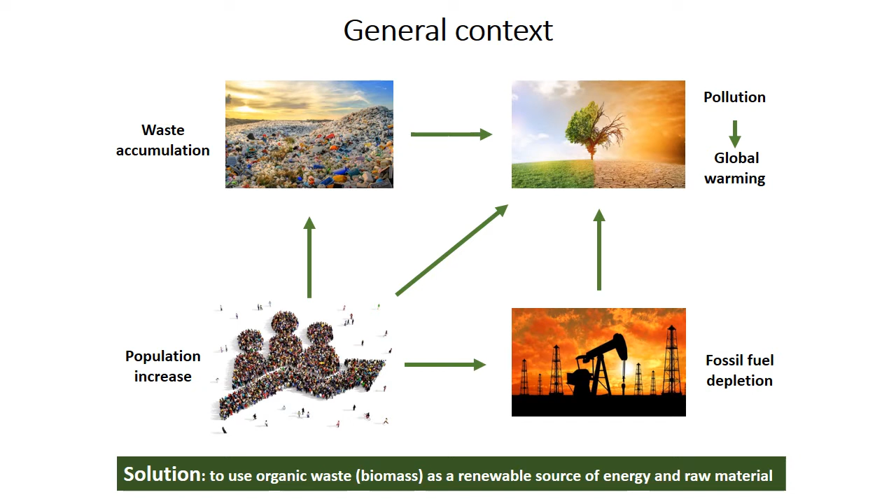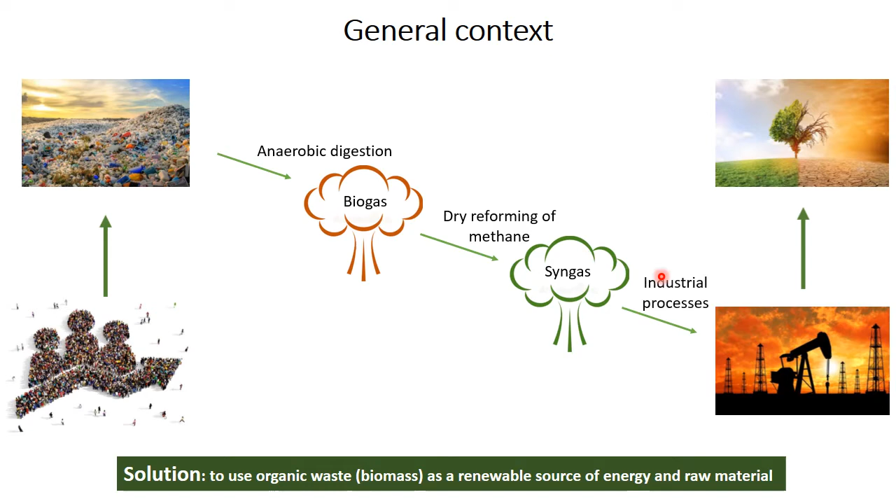To break this cycle, the solution would be to use the waste accumulated to produce biogas through an anaerobic digestion process, and then to convert it into syngas or synthesis gas through the dry reforming of methane reaction. Then the syngas can be used in several industrial processes to produce sources of energy and other raw materials.

So the process we are going to discuss in this presentation is first the production of biogas from biomass or organic waste using the methanation or anaerobic digestion process on an industrial scale, and second, the conversion of biogas into syngas on a lab scale using the dry reforming of methane reaction.

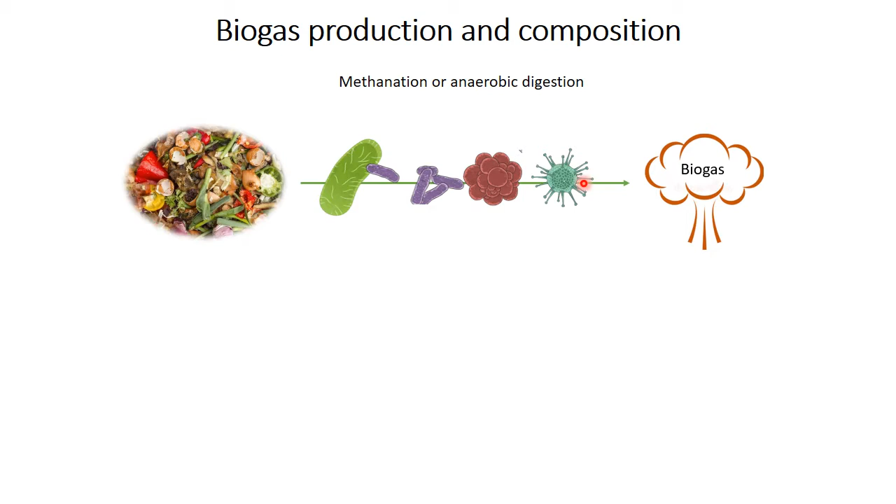First, we are going to start by discussing the anaerobic digestion process that converts biomass into biogas. This process takes place in an environment without oxygen in the presence of several microorganisms, mainly bacteria or archaea. In these conditions, a series of reactions can take place to break down the organic matter into a gas called biogas and composed mainly of methane, carbon dioxide, and nitrogen, and it can contain small quantities of water and oxygen.

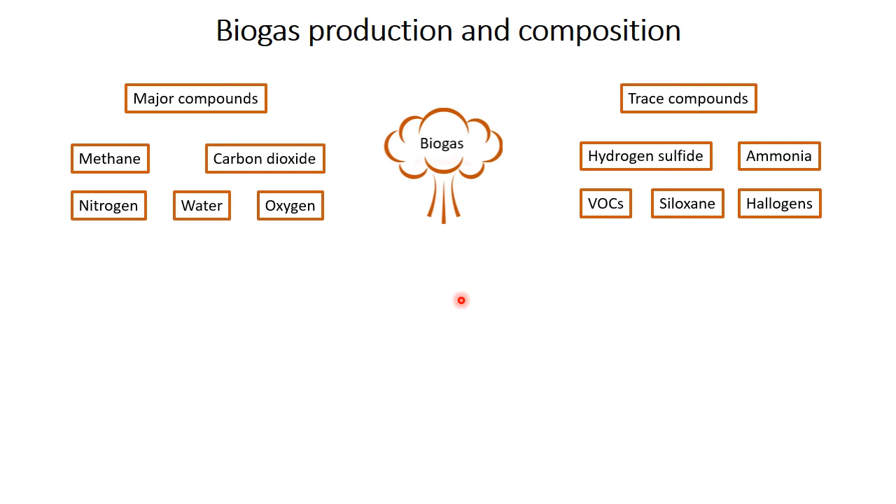In addition to these major compounds, some trace compounds such as siloxane, hydrogen sulfide, ammonia, halogen compounds, and volatile organic compounds can also be found in biogas. Its composition depends on the process conditions, on the microbial population, the composition and age of the initial waste, as well as the methanation plant. Biogas can be produced in an anaerobic digestion plant, in a landfill, and in a wastewater treatment plant.

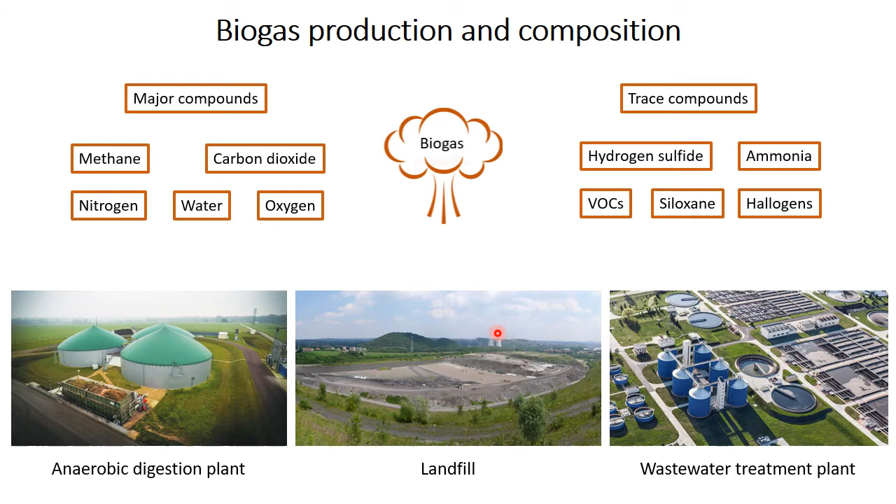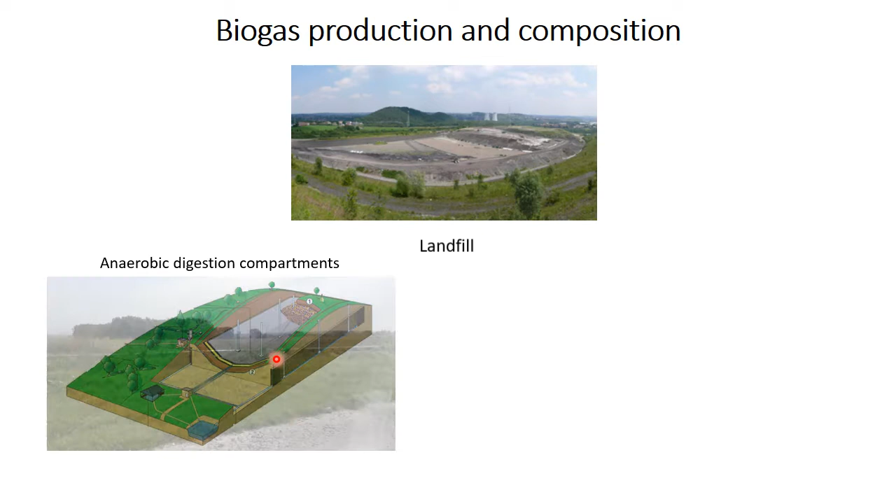In our study, we have chosen to work with biogas produced in a landfill located in the north of France. This plant is made of several sealed underground compartments where waste is stored. This is where methanation takes place. Then the produced raw biogas is directed using conducts into an upgrading station where undesired products such as H2S, siloxane, and VOCs are eliminated. Finally, the clean biogas is used in a cogeneration system. In our study, we have analyzed the biogas at the outlet of the underground compartments, here, right before any purification treatment has occurred.

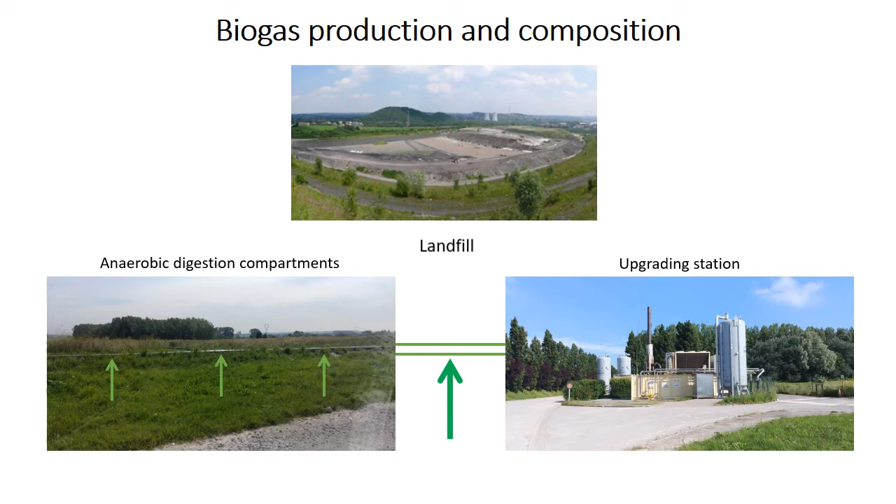Gas chromatography was used to determine biogas composition. This technique was coupled with a thermal conductivity detector for major compound identification and quantification, as well as a flame ionization detector for minor compounds. Methane and carbon dioxide represent respectively 33 and 27% of biogas composition. They are the most valuable gases for its valorization. Oxygen and water are detected in smaller concentrations of 4 and 1.5%, and they can also play a role in biogas valorization.

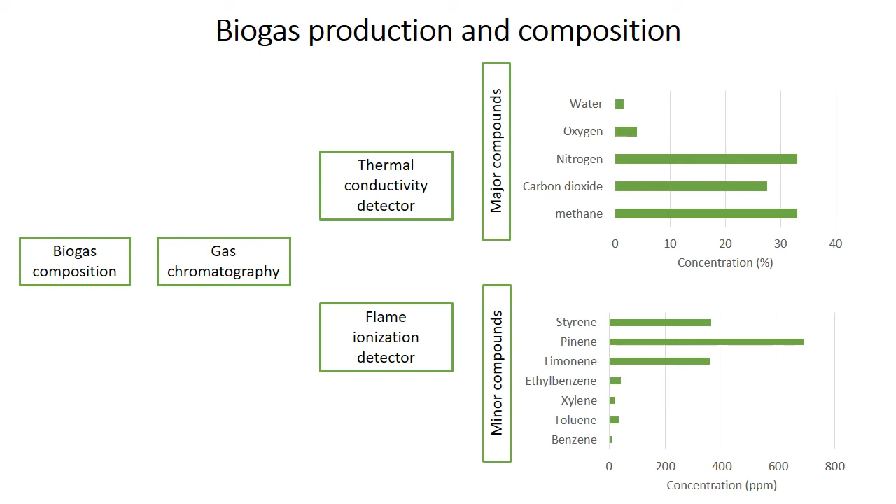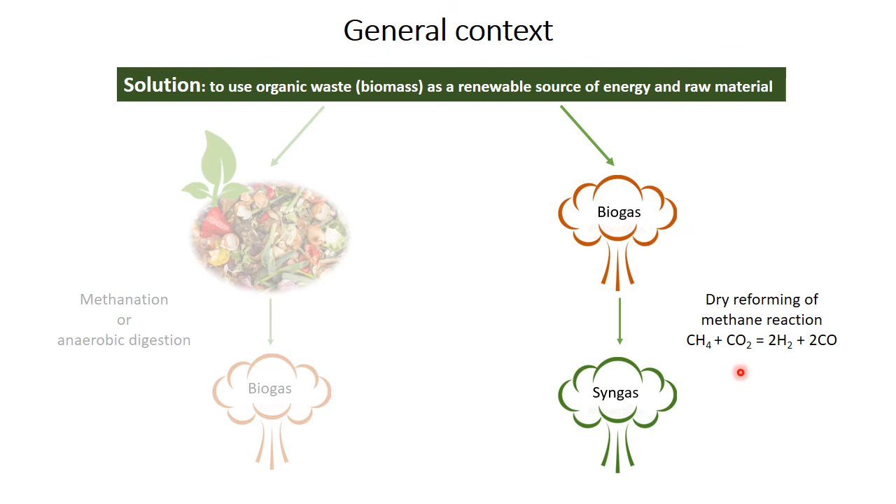The presence of these compounds may affect the valorization process of biogas, which is why they are removed during the upgrading process. In this study, we have chosen to determine the effect of the presence of these molecules during the valorization of biogas in the dry reforming of methane reaction. This reaction is the conversion of both major compounds of biogas, methane and CO2, into synthesis gas made of hydrogen and CO.

However, this reaction is highly endothermic and requires temperatures higher than 670 degrees for taking place. For this reason, it is important to use a catalyst to increase the yield of the reaction at lower temperatures. On the other hand, the catalyst needs to be selective towards the dry reforming of methane reaction because secondary reactions can also occur in the same temperature range.

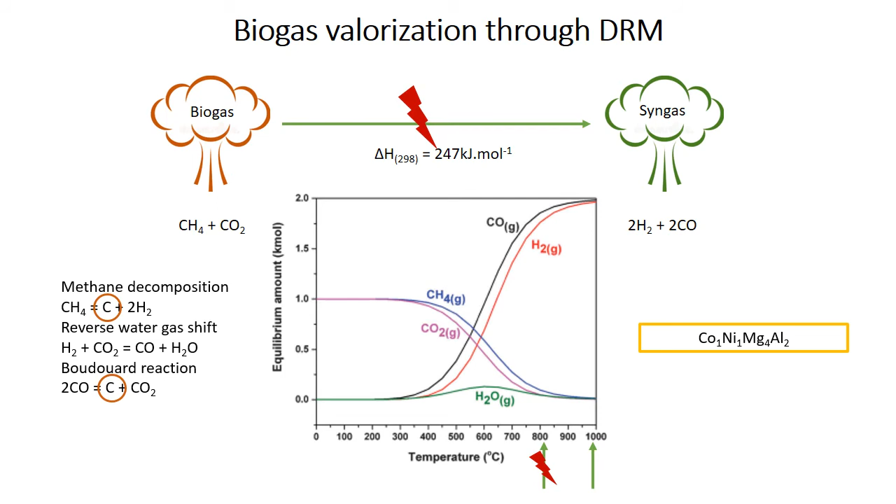More specifically, carbon-forming reactions such as methane decomposition and Boudouard reaction can take place and cause the deactivation of catalysts by carbon deposition. In this prospect, we have studied the effect of the presence of VOCs molecules on the performance of a cobalt-nickel-based catalyst that was already determined to be active in the DRM reaction in previous studies.

The catalytic performance was monitored using the following setup. In the current study, toluene was selected as model molecule for VOCs. A series of 12-hour stability tests was performed at 750 degrees on the reduced catalysts.

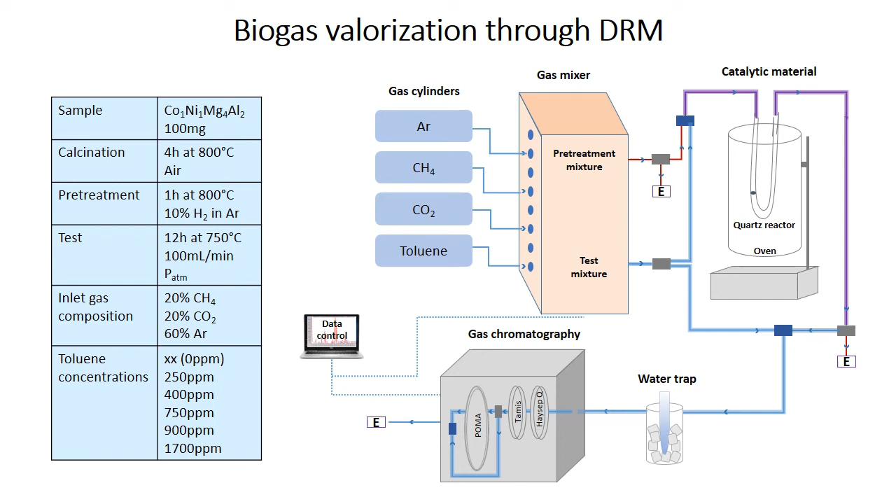The synthetic mixture containing CH4, CO2, and toluene diluted in argon was passed through the quartz reactor containing the reduced material and then was analyzed by gas chromatography coupled to a thermal conductivity detector. The concentrations of all inlet gases are comparable to the concentrations that were detected from the biogas analysis. The conversions of reactants as well as H2/CO ratio were monitored.

We have followed during 12 hours the conversion of methane and carbon dioxide in the absence and the presence of different concentrations of toluene. The catalyst remained stable for the duration of the test in all of the mentioned conditions. This shows that the presence of even the highest concentration of toluene did not cause the complete deactivation of the catalyst. On the contrary, the curves show that in the presence of toluene, the reactants' conversion increases with time.

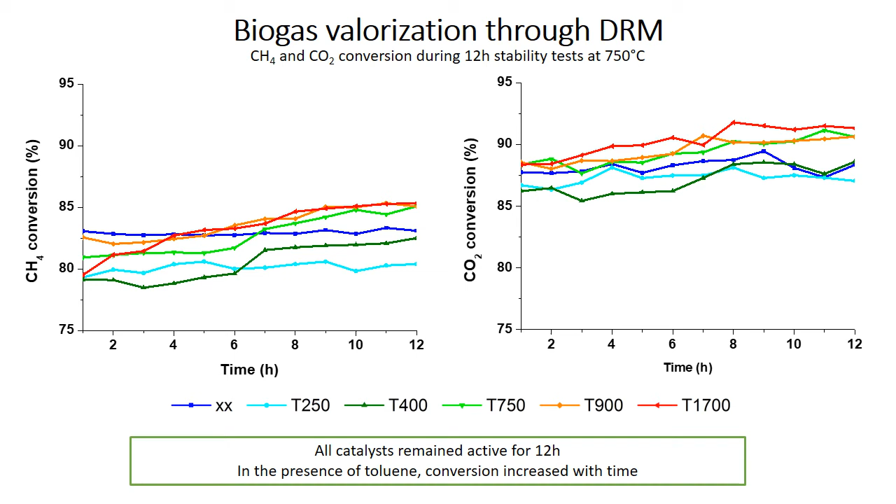We also notice that the conversion of CO2 is higher than the conversion of methane, signaling the occurrence of secondary reactions. This result is confirmed by the H2/CO ratio lower than 1. This could be linked to the occurrence of the reverse water-gas shift reaction, which converts CO2 and H2 into CO and H2O. This would explain the conversion of CO2 higher than CH4 that we noticed during the test, as well as the H2/CO ratio lower than 1.

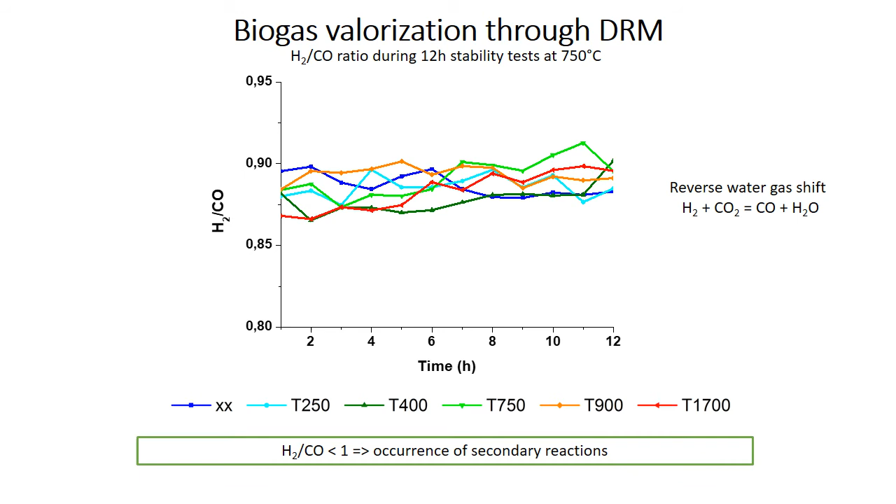After the stability tests, the used samples are analyzed by thermal analysis. This technique allowed the quantification of carbon that was produced during the test. All samples contain carbon, however, carbon formation increases in the presence of toluene. The carbon-related weight loss goes from 8% in the absence of toluene to 58% at its highest concentration.

Moreover, from the DTA analysis, at least two types of carbon are identified. Filamentous carbon that's oxidized at 450 and 480 degrees, as well as graphitic carbon that's oxidized at 600 degrees.

This correlation between toluene concentration and carbon formation could be due to either toluene containing 7 carbons, which means that if toluene decomposition is occurring, it will lead to the production of more carbon, or that the presence of toluene could block some of the active sites involved in the dry reforming of methane mechanism, slowing down the carbon reoxidation step and causing the carbon accumulation.

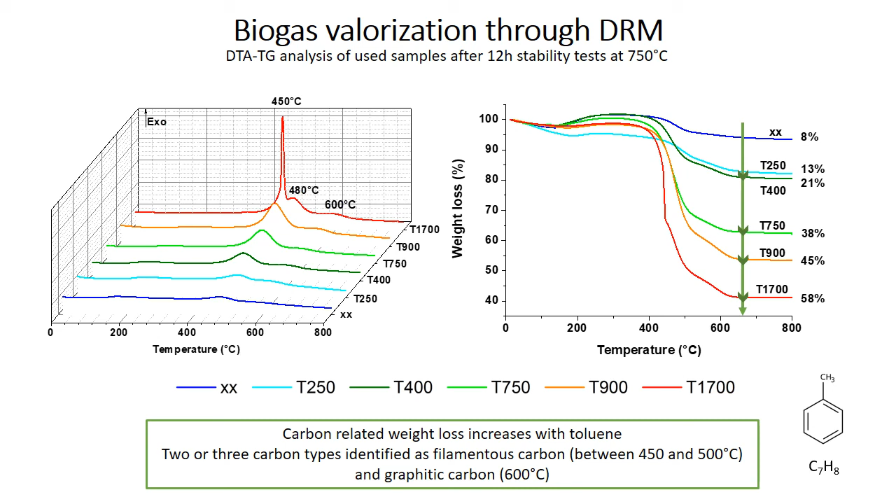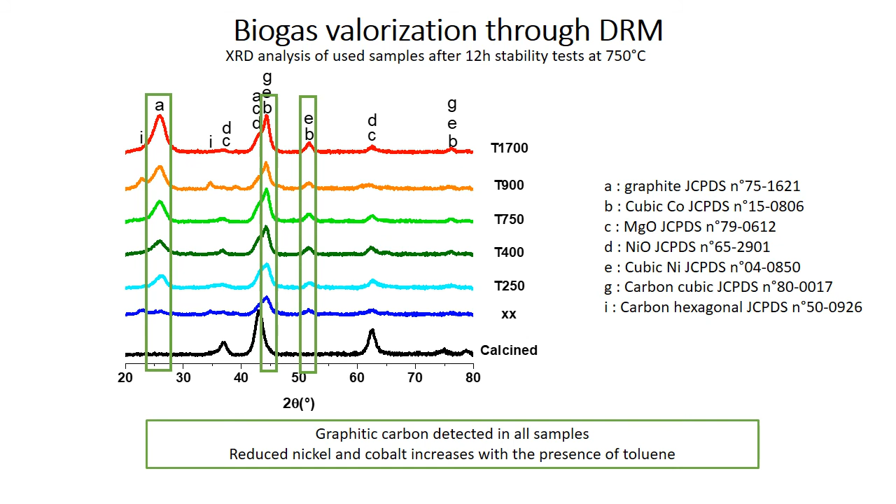In conclusion, the composition of biogas from a landfill was determined. The concentrations of methane, CO2, and VOCs determined from this analysis were used during the lab-scale experiments on the dry reforming of methane using cobalt, nickel, magnesium, and aluminum catalyst. During the dry reforming of methane tests, the catalyst remained active even at high concentrations of toluene. However, thermal analysis proved that the addition of toluene increased carbon formation.

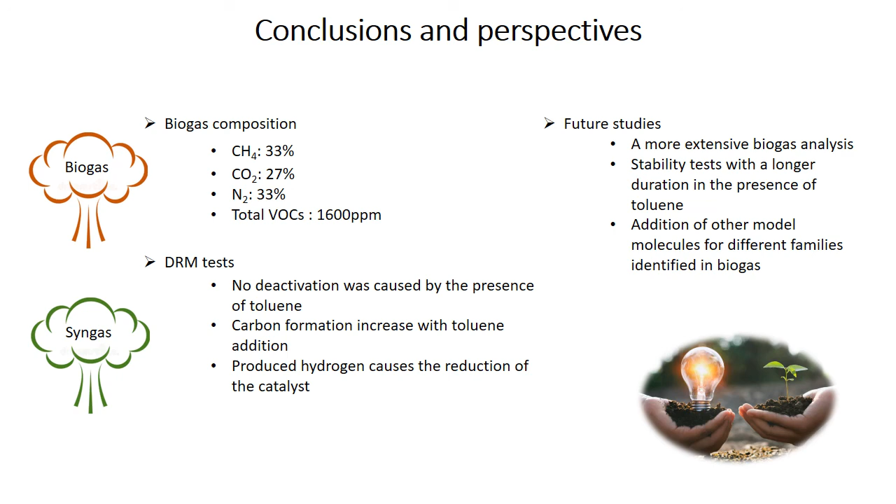It's important to remember that even a high quantity of carbon did not cause the deactivation of the catalyst, but it could significantly shorten its shelf life during a test of longer duration. This study proved the potential of DRM reaction in valorization of biogas even before its purification step. As future perspectives, it would be interesting to increase the duration of the stability test, as well as to monitor the effect of other model molecules also identified in biogas on the catalytic performance.